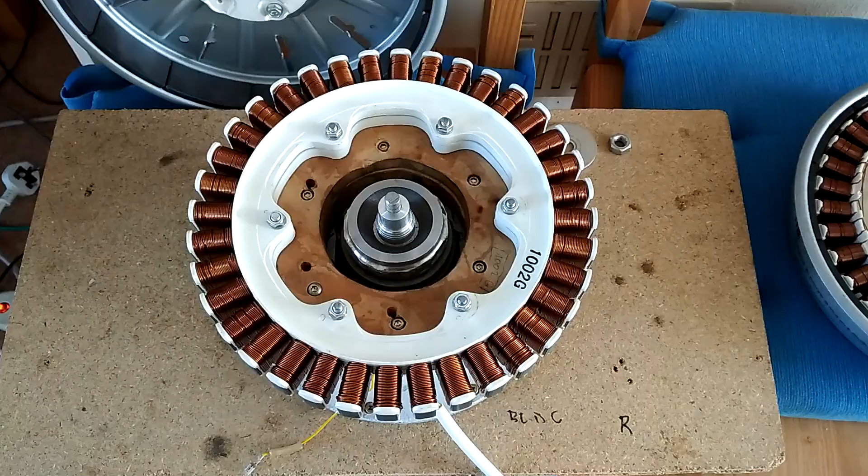So let's demystify the controller Gerard was talking about in this washing machine BLDC motor. So everybody knows that. So this is the... Let's start from hardware, okay? So we will run this one. So you can see this is a standard winding.

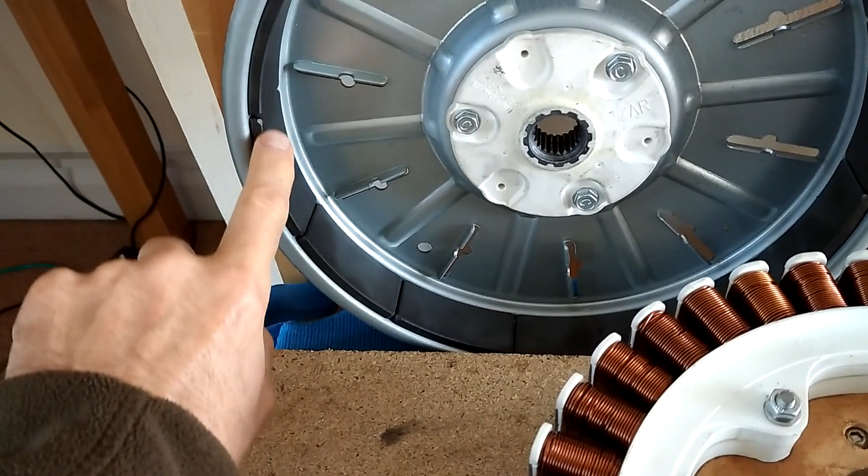I think the wire is around 0.8 millimeter, about 90 turns per slot, and of course that's 24 pole pairs, because every single magnet has four poles. So altogether it's 48 poles, so 24 pole pairs, and we have 36 slots. That's the slots, right? So this is something like this one.

This unfortunately does not have a specification printed on the drum. This is very similar. It's not the same, but it's very similar. So this is what they say: 310 volt DC, 0.6 horsepower, 2 amp, 1400 RPM. So the question is, can we run at least this 1400 RPM with 310 DC? Well, my answer, and I will show you that, is yes and no.

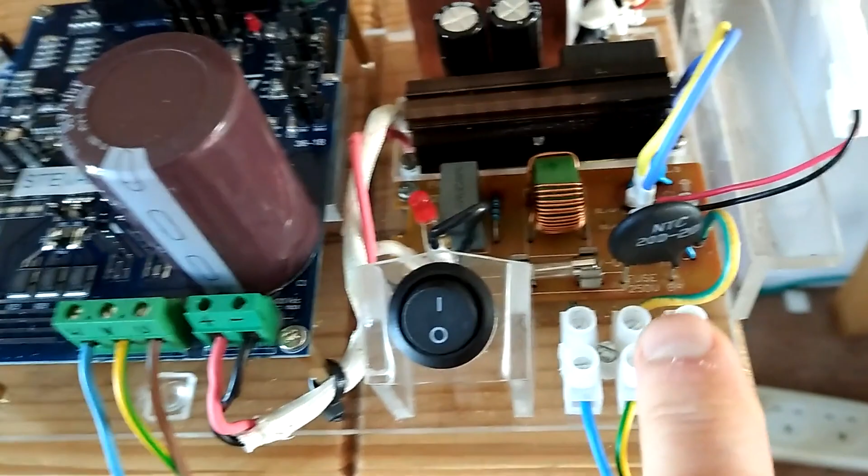Okay, so this is a drum. This is a driver you can build. So what is it? Let's start from here. So this is 240 going through the filters. Very simple, like NTC. This NTC is a little bit too strong because it's 20 ohm. Then AC filters. This is rectifier and capacitors and DC coming into here. So as you can see here, maximum 450 DC is coming here. So normally when you connect into 240, you will have like 330 DC on input.

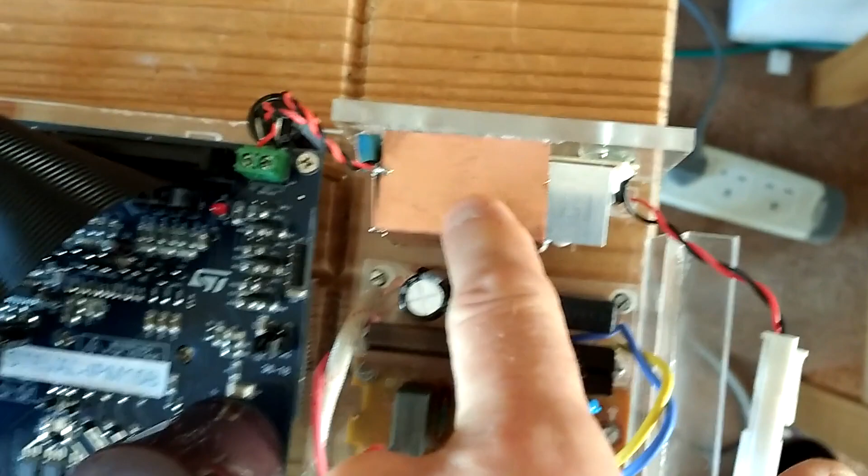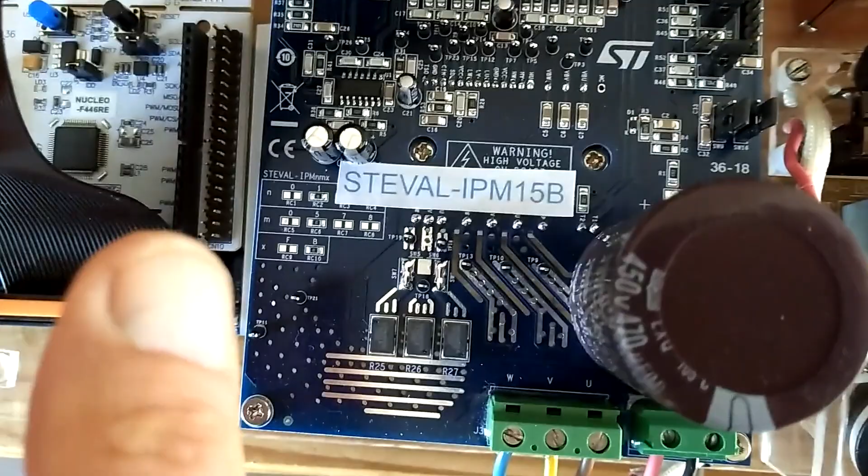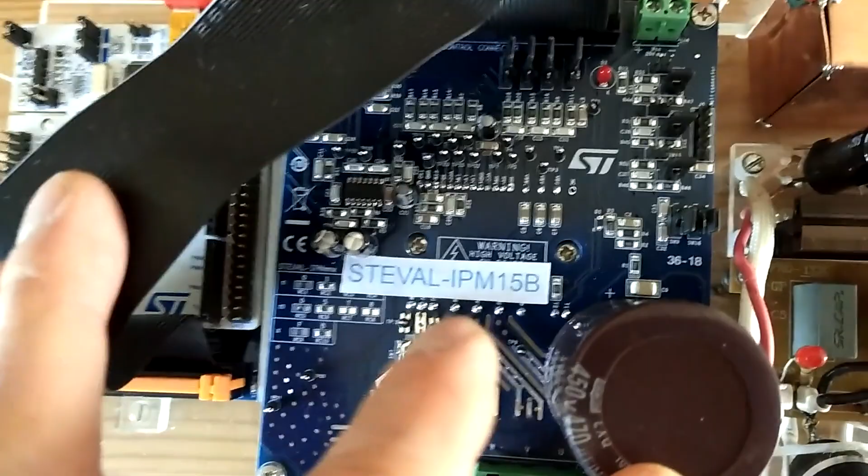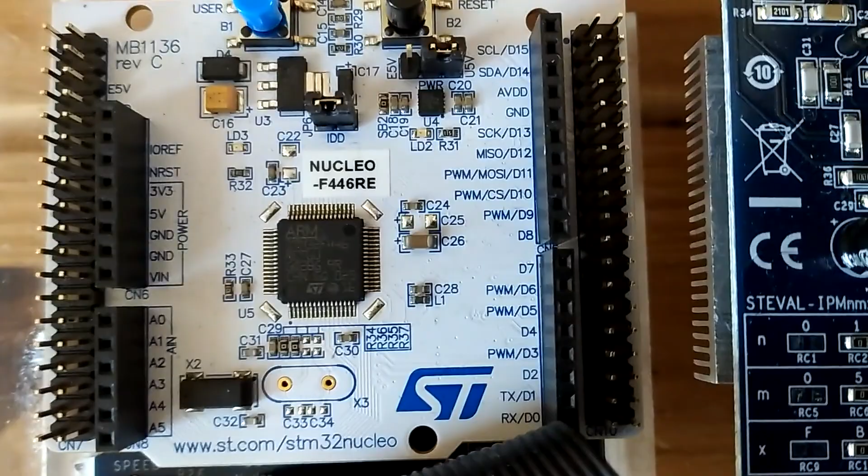And this box is just a DC power supply, 18 volts, because you have to feed this electronics here. So as you can see, here is VCC 20 volt max, and we're using 18 volts. So this is the power stage from STMicroelectronics, STEVAL-IPM15B. So that's a 1500 watt power stage. This is controlled by this controller. I use this one for a reason; I'll show you why. And we're running this processor, Nucleo F446RE, and this is connected to the computer, and we will run the program, and I'll come back in a second.

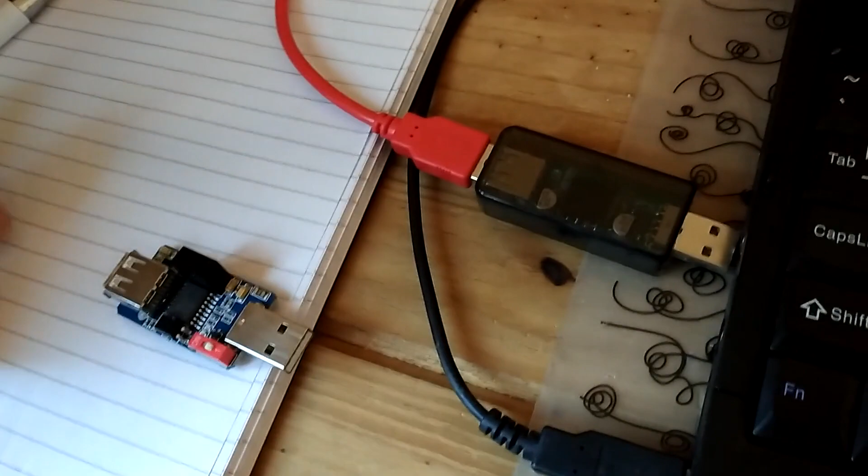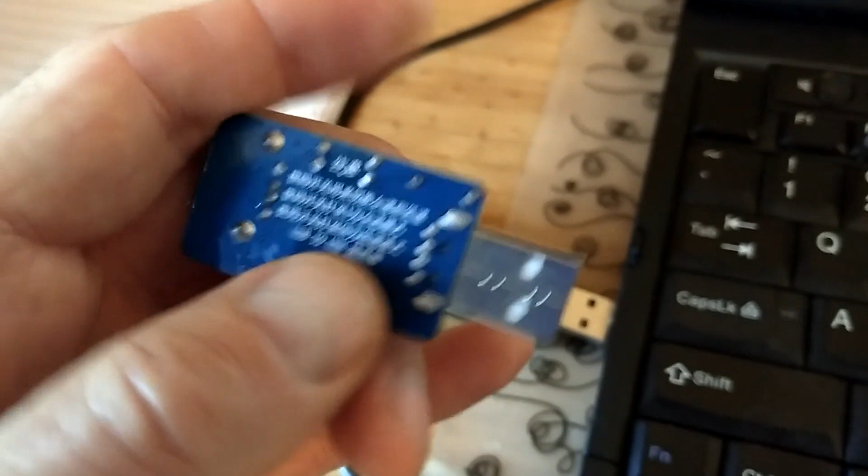Last piece of hardware you need to have is this USB isolator. So this is something like this. It's quite cheap, like 12 pounds or something like that. You can see USB to USB. That's the only thing I can understand from here. And it could be this one, could be that one. USB isolator, right? And why is that? Because on the power stage you have quite high voltage, and it's connected via USB, and you don't want to connect directly into your laptop. So you just need to run it through this one. So we'll connect that,

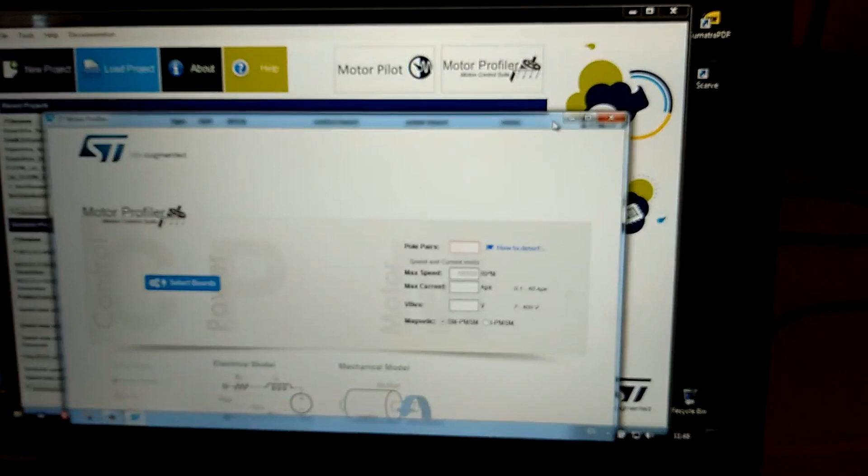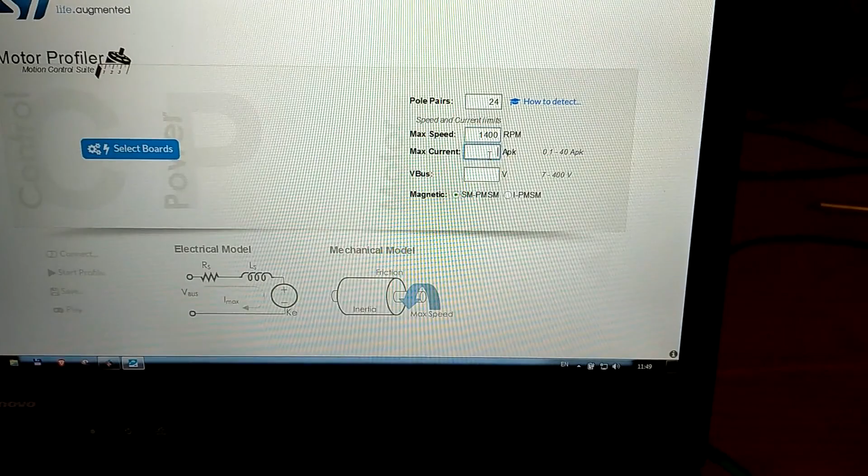and it's already alive. And this is the software we will use, ST Motor Control Workbench. From here, we will go to Motor Profiler. So this is very nice software, which will profile our motor, for which we don't really know all parameters. So we know that we have 24 pole pairs. We want, as they say, 1400 RPM. Max current, they say 2 amps, but let's do 2.5 amps. And V bus, we'll leave it here. So this is something between 7 and 400.

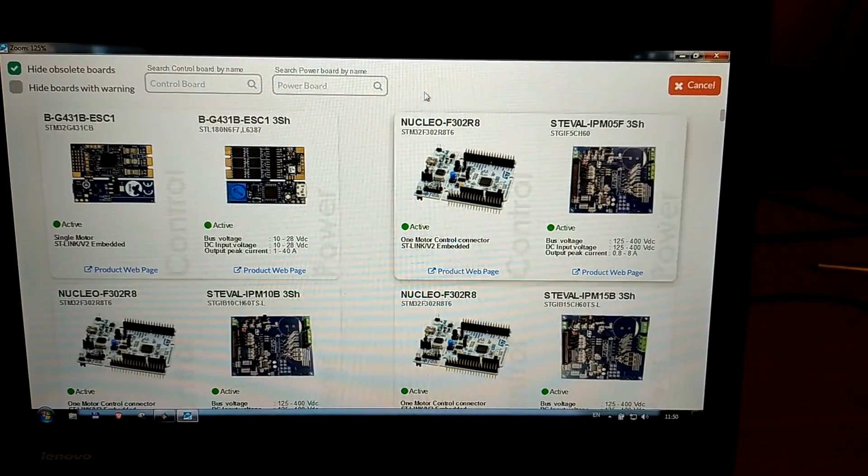But first, actually, we're supposed to select boards. Not all boards available from ST Microelectronics support this motor profiler. So this is the reason why I chose Nucleo F446RE and STEVAL-IPM15B. So we will go 446RE, there you go, and power board 15B. Okay, so we have a pair, they are active, all good. There you go, and it's ready.

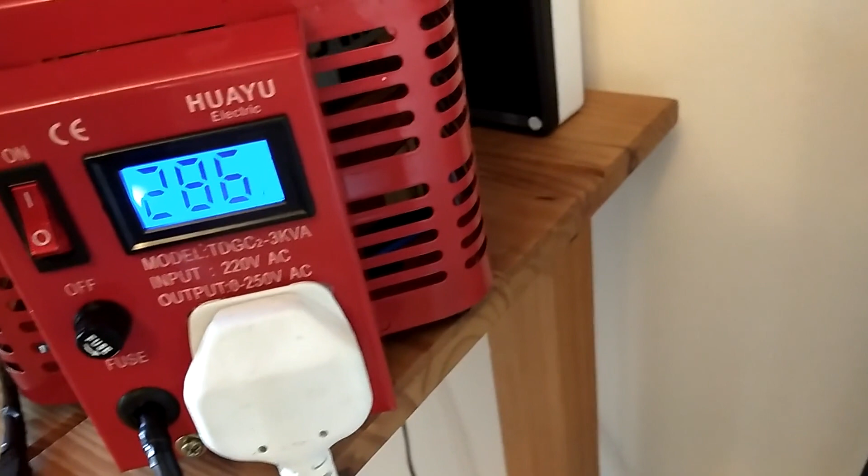This is fed. The power supply goes into an autotransformer. So now it's quite high voltage. We don't want that kind of high voltage because I want to show you something. So let's go back down to 220 volt AC. We will feed it into this one. So that will be about 300 DC on the input here. Okay, and let's start profiling. So we will connect to the board, and now we'll see the information.

There you go. Firmware upgrade required. Why is that? The reason is because there is a different firmware already in the chip, and the firmware needed for profiling is different, simply speaking. So we need to upgrade the firmware. Sorry about the focus, I can't do anything about it. So there you go, everything is ready. So start profile.

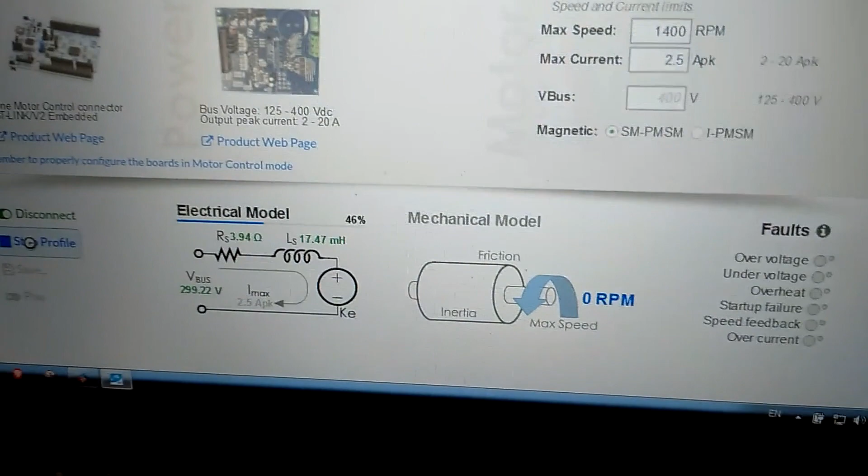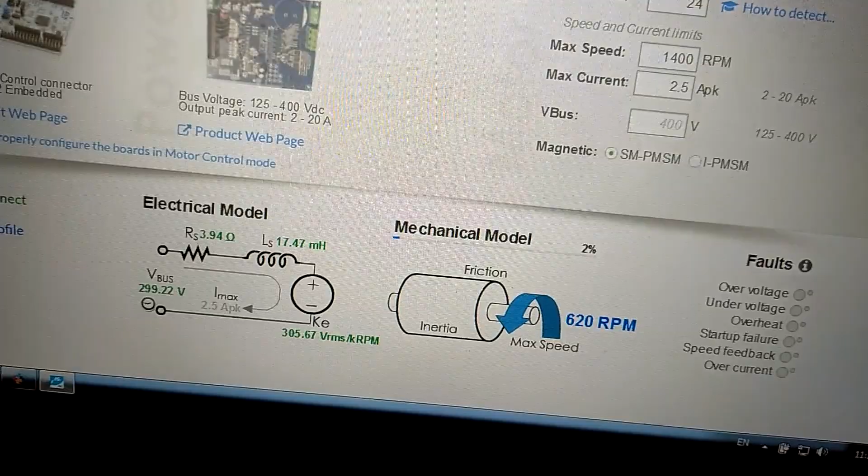It's doing something. Yeah. So already we know the electrical model: 3.9 ohm, 17.5, and this is VRMS. You see the V bus here, 299 volt DC, and this is 2.5 amp we set up. So this is back EMF measured from the motor.

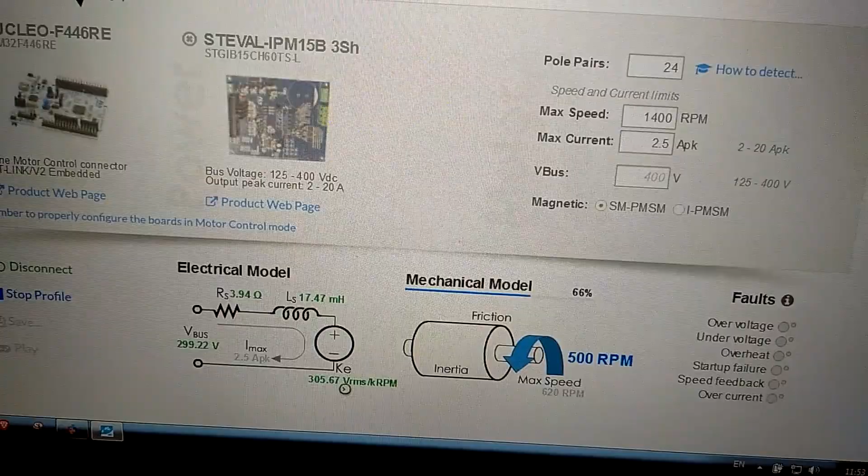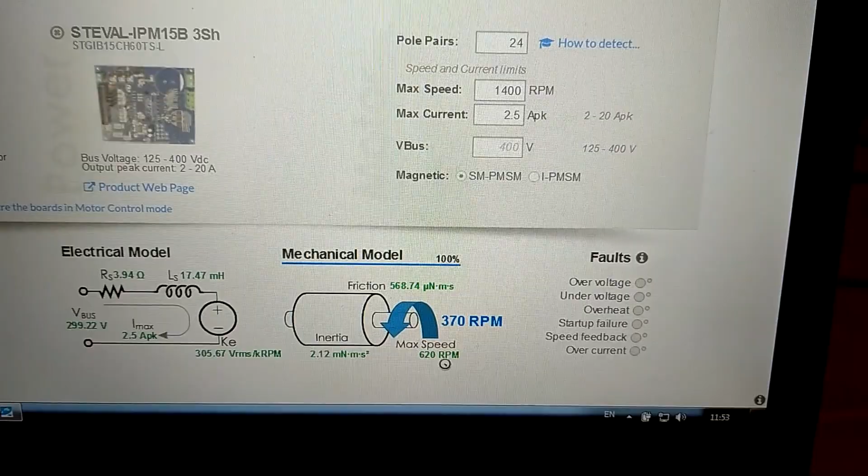And funny enough, it will be a little bit different in a moment, but you will see on average it's 300 something volt per 1000 RPM, KRPM. Can you see the max speed? 620 RPM. And we have friction, inertia, that stuff. You see, this is the maximum speed we can get on this voltage, which has now gone down. It was about 300 volts.

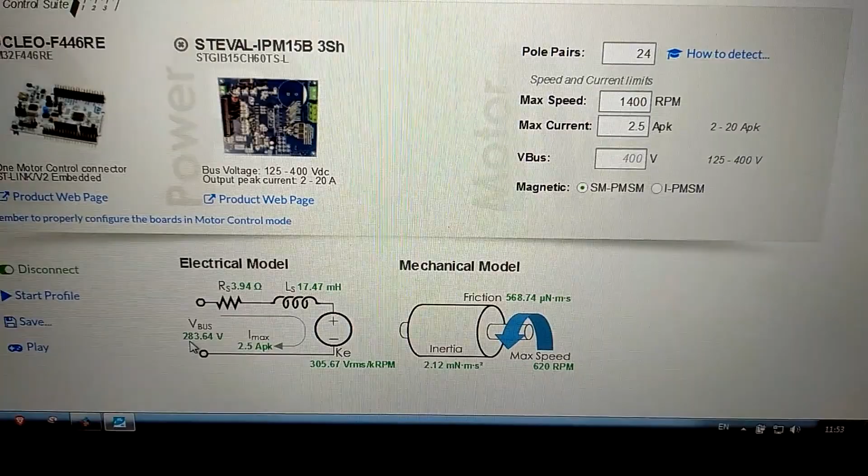Why did it drop from almost 300 to 283? It's because of this NTC, which is not charging fast enough, but it's just an average. So you see that's all we can get. So okay, that's fine. Let's disconnect. Remember this one, 620 RPM.

And let's give it a little bit higher voltage. Let's get up to 280. Yeah, 296 volts AC, which will be 300 something, almost 400 DC in here. So let's connect it again. USB. Okay. Okay, and start profile.

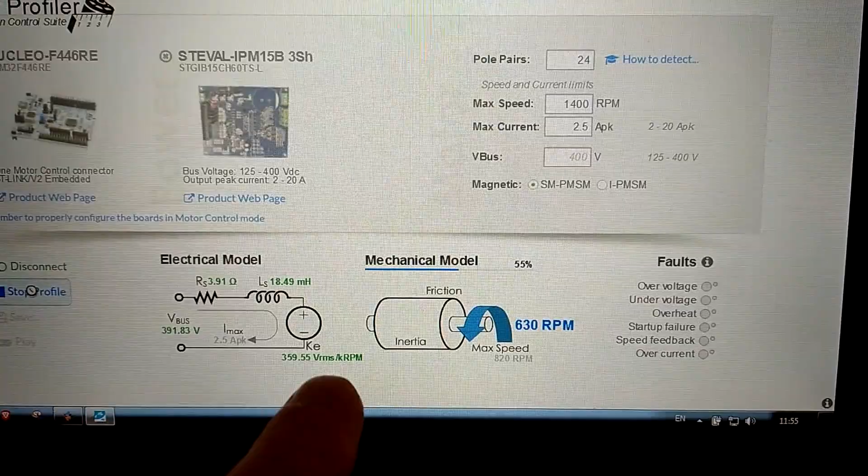390 DC. And what we can see here, we already have 820 RPM compared to 620 RPM. But also, can you see this one? Before it was like 300 VRMS, now we have 360 VRMS. I just raised the voltage. So you have to average that, yeah?

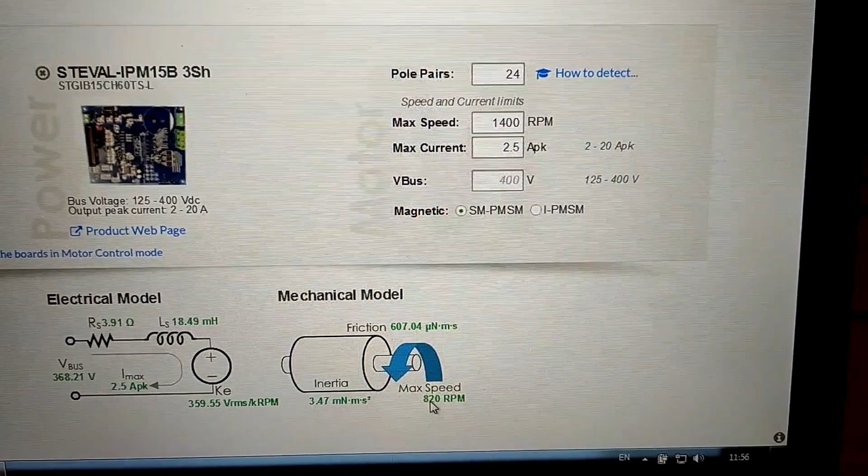You can measure back EMF, this KE value, by spinning the motor by hand, or with a drill or whatever, and measure it on an oscilloscope. But this is a really nice tool to see what's going on. So you can see it's 800, it went down. So it's almost 400 volts and 800 RPM. Nowhere close to 1400 RPM.

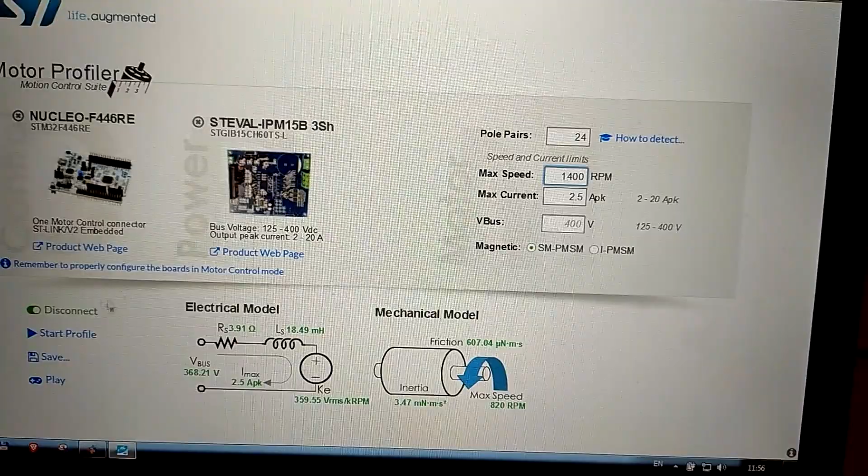So why is that? Why do they say that this motor is running at 1400 RPM? Well, because it's a washing machine, they're doing a trick which is called flux weakening. And we will come back to this in a moment. So let's disconnect. Okay, come back in a sec.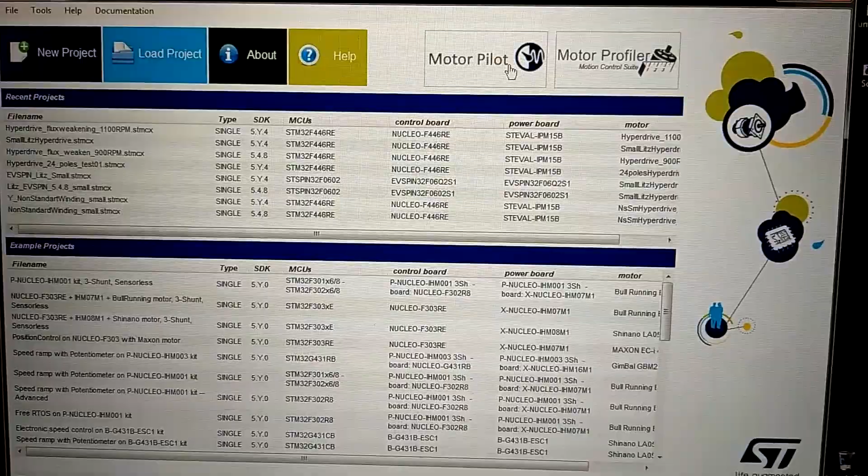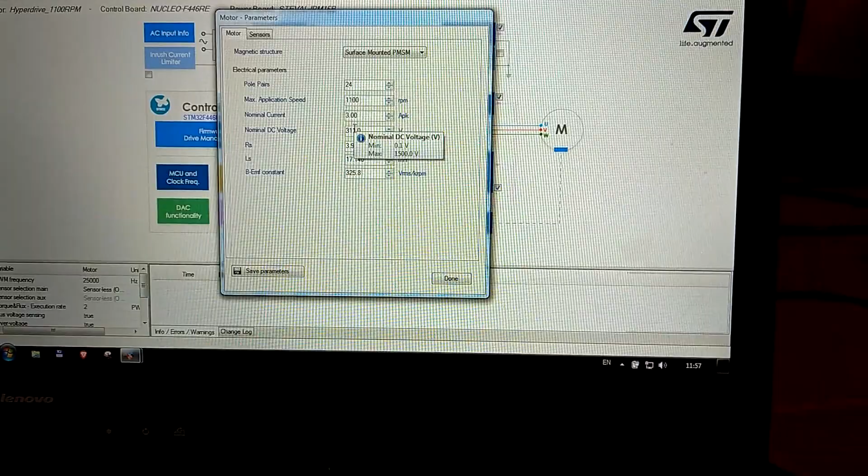So here we have a project using this hardware. Let's click on the motor, and you have to configure, because normally if you just used the motor from the profiler, you would have 820 RPM or something like this. And nominal DC is 311. We don't like it. Let's do 360. And let's leave 1100 RPM for now, because this is more than 800 RPM anyway. And let's do nominal current 3 amps. The rest is fine.

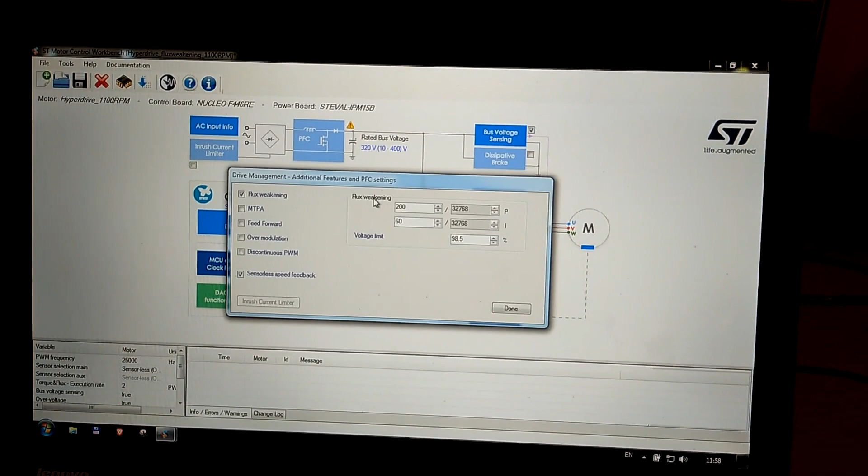So done. And here in drive management you have an additional feature. You have to tick this box, flux weakening. Obviously it's not enough to just enable flux weakening. You have to configure these values here, but that's a completely different story. For now, let's just try to run it at more than 800 RPM. They say 1100 or 1400 RPM with 300 something volts, so I just want to show you what's possible with and without.

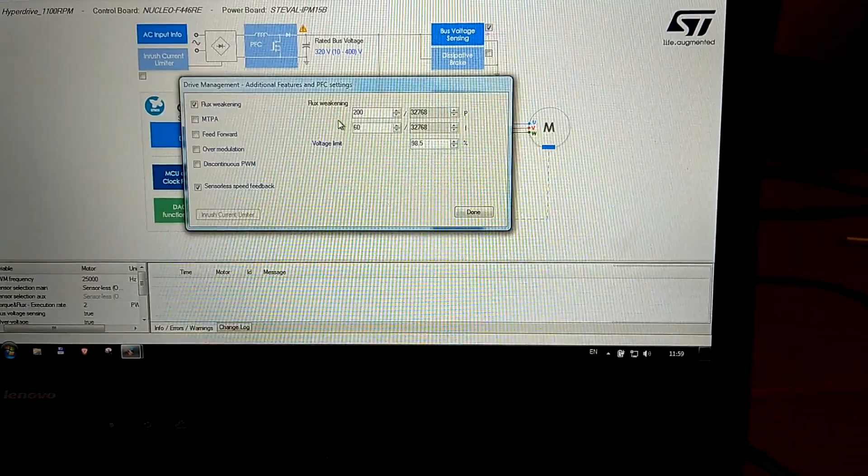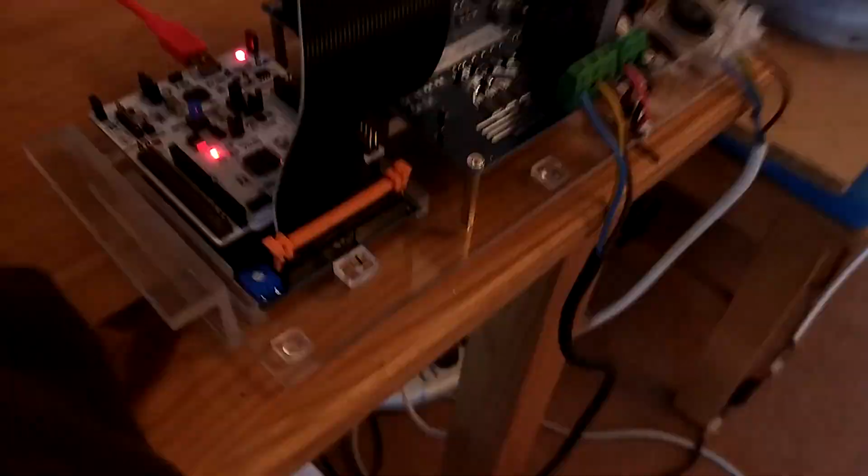So without it, as I already showed you, almost 400 volt DC will give you around 800 RPM with this motor, and no more. You can't do it because of the back EMF from the motor. But you can use flux weakening, and let's see if we can. So now I will configure everything and transfer the firmware into the controller, and I'll come back in a second.

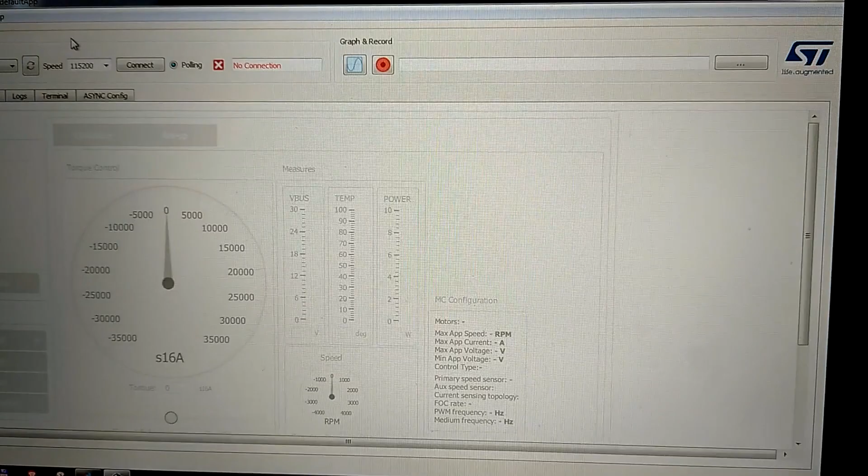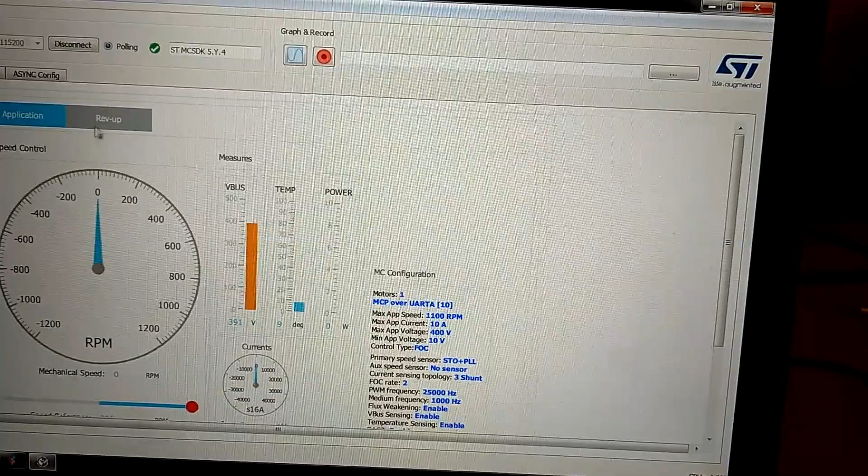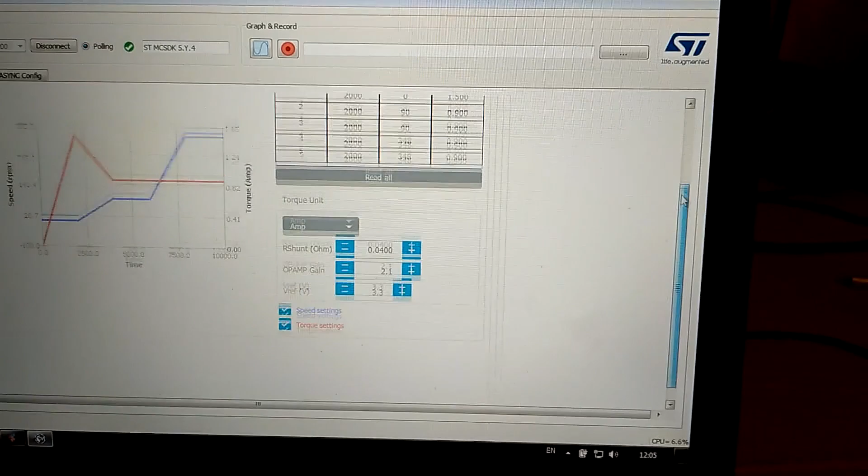Okay, firmware is already transferred, so now we will use MotorPilot and connect to the board. Connect. Let's see, 1100, 10 amps, so let's quickly configure all of this. Reload, change these values, 0.04 for shunt, and the op-amp gain is 2.1 for this board. Okay, and go back. The screen is small, so I have to go back and forth. Just bear with me.

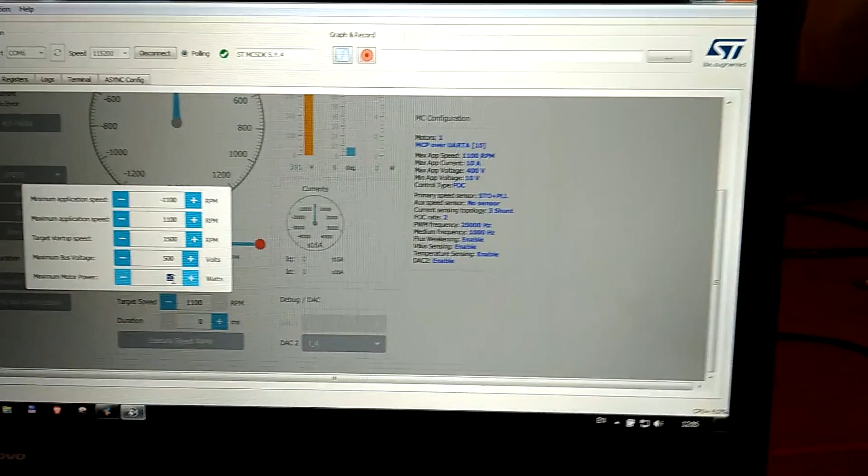Application configuration: we want not 10 watts, that's not enough. Let's configure for 400. What I've done just now is just this value here, power, right? So we will see from 0 to 400 watts of power what the application is taking, power stage, and advanced configuration to see some values here on the right side.

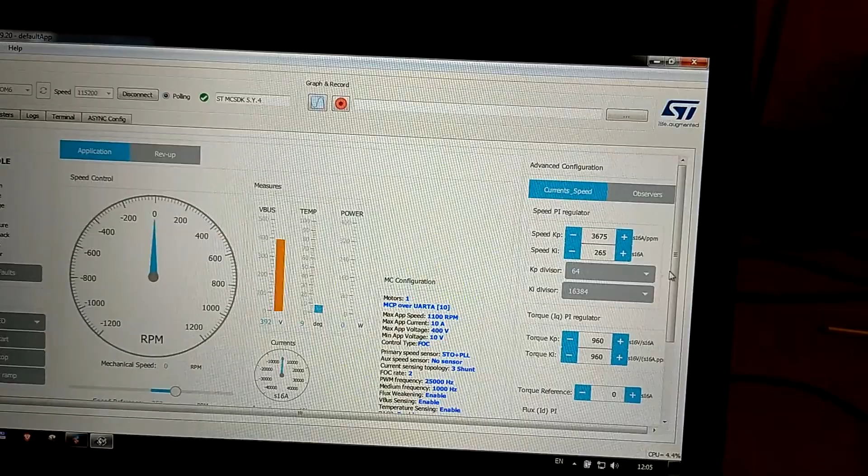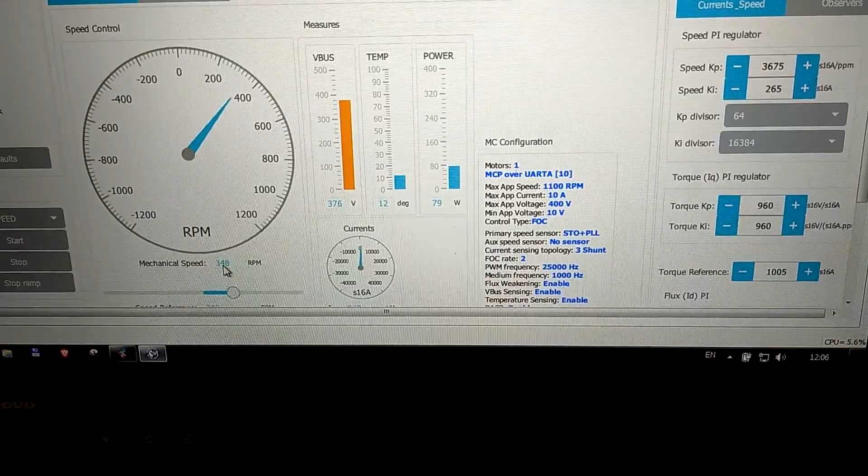And we will start from 350. Let me see, this is set up for 350, so 350 RPM. Then we will go to 500 slowly, not rushing. So okay, it's all good, and start. There you go. Okay, so now we have mechanical speed 348 RPM.

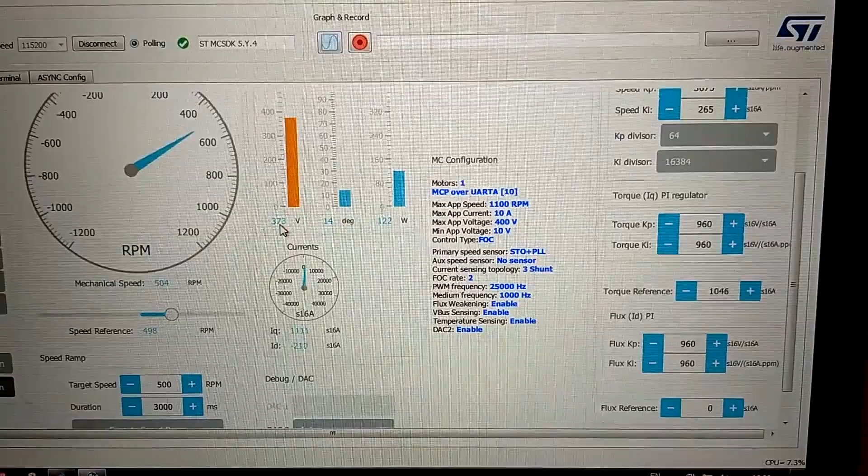Okay, so let's speed it up to 500. Cool, works. How many volts do we have? We have 373 volt DC. Okay, let's go to 600. 700.

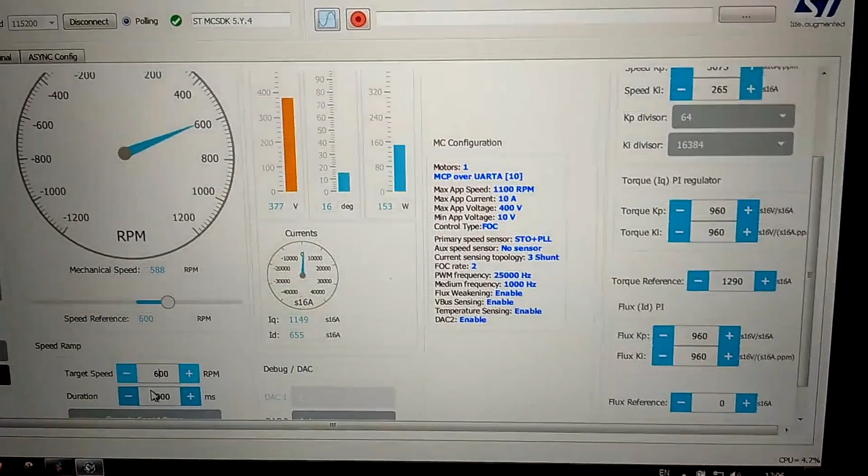700. 800. So we're coming to the point of the amount of RPM we can get without flux weakening. But because in this project I configured flux weakening, as you can see here, flux weakening enable, right? Then I can go further. 900 RPM. Yeah. 900 RPM.

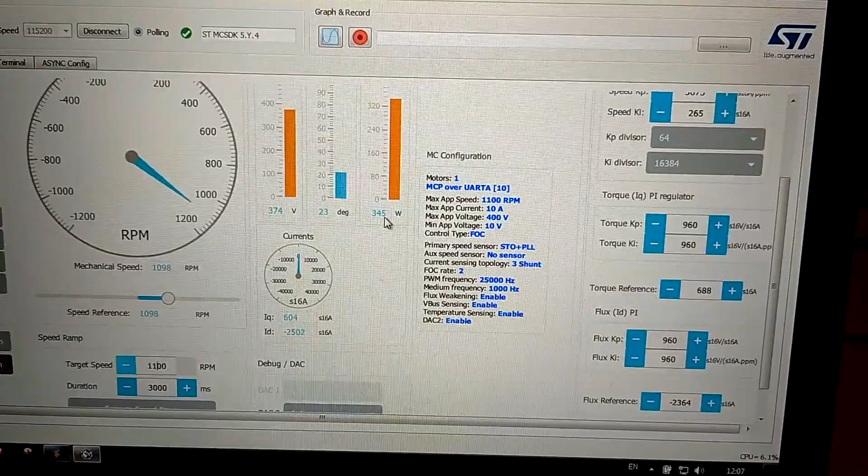Let's go for 1000. Yes, we got it. 1100. We have 1100 RPM, mechanical speed, and it takes 350 watts. Can we go further? Not at the moment, because I configured only for 1100 RPM. So even if I will do 1150, I won't get anything because it's not configured, right?

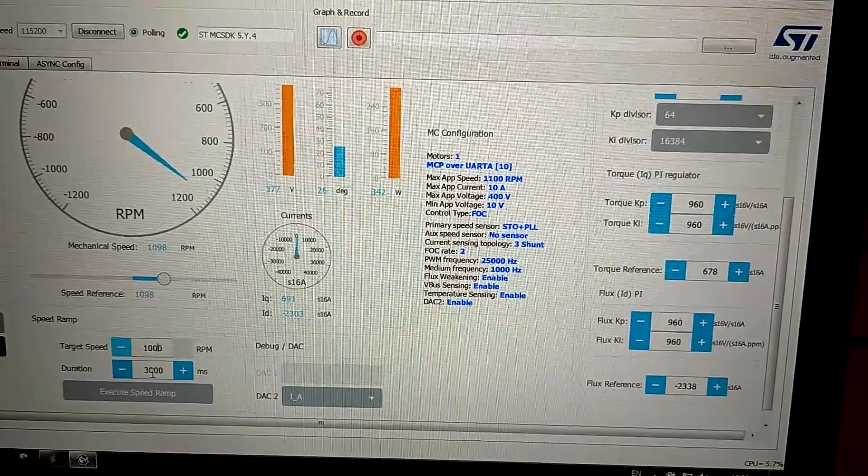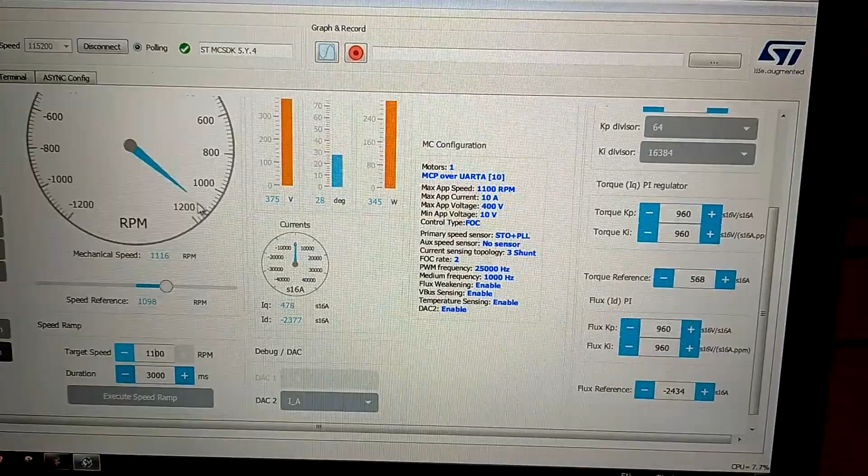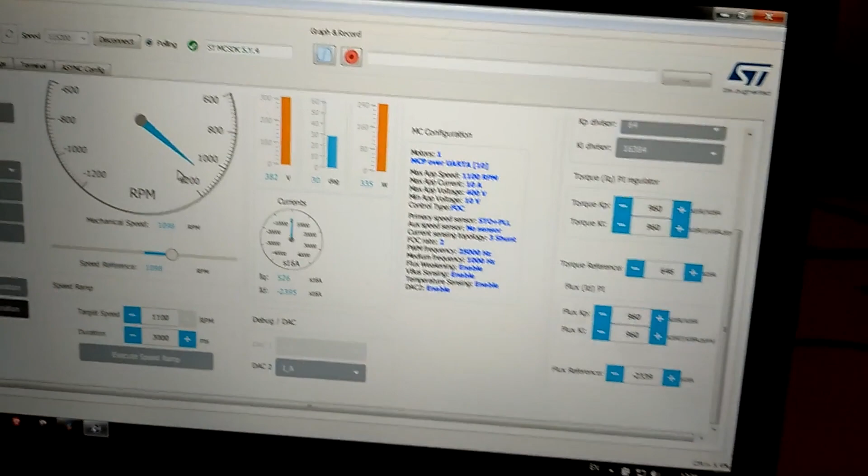So slowly, let's go down. Okay. Let's go back to 1100. Let's confirm. Oops. That's because it jumped into 1200 because it's not fully configured with speed regulators over here. But that's a completely different story. Now we're just showing that we can get more speed for a voltage which allows us only, like, 800 RPM. We can get 1100 and 1200 and maybe more.

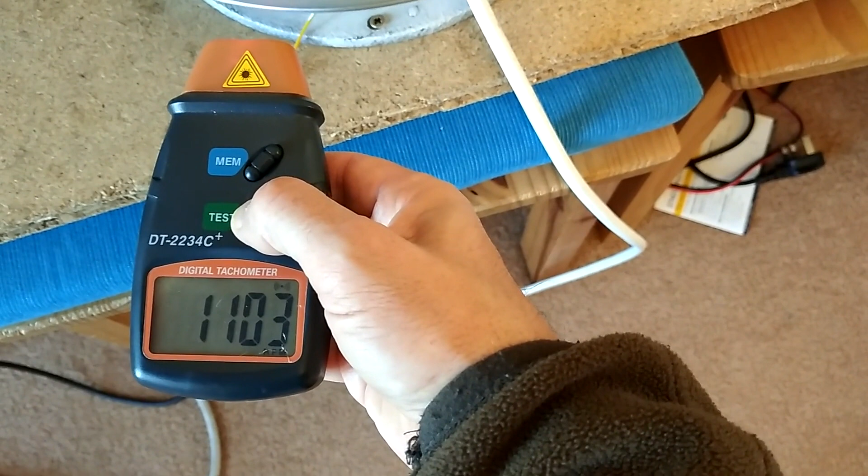And let's confirm that. It's 1100 RPM. Yep. Okay. So now the problem is that back EMF is so strong that if all of a sudden the flux weakening algorithm would stop, it would most likely blow the power stage, because all the voltage will go back into the power stage from the motor, and it will be boom, disaster, right? So I will go slowly.

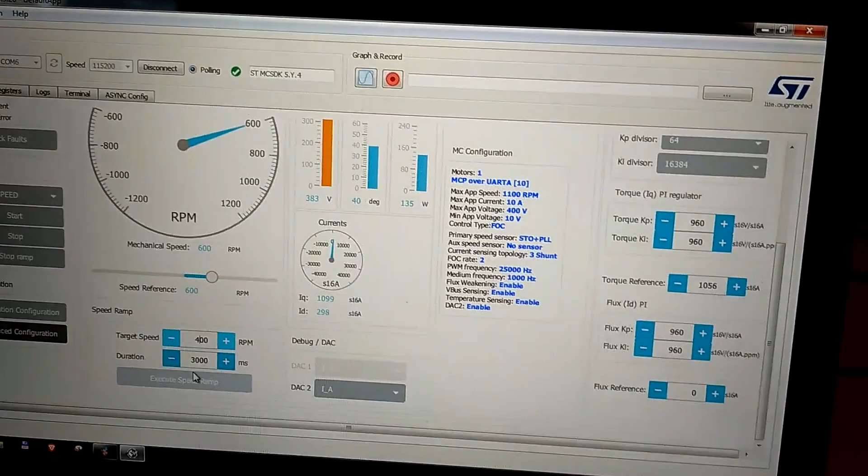So that's fine. 400. So the question would be, for 400 volts, can we get 3000 RPM? I don't know. I don't think so, to be honest. But here's a problem with flux weakening. Okay. Here's a problem. So what's happening when a motor spins?

Yes, the faster it spins, the stronger back EMF is growing. So if you have enough voltage to counteract the back EMF, you can still run some current and spin your motor faster and faster to the point where the difference between your V bus and your V EMF, back EMF, is almost the same. It's quite difficult for me to write it looking on the phone. And no current flowing, so you don't have any torque, right? So there should be some difference.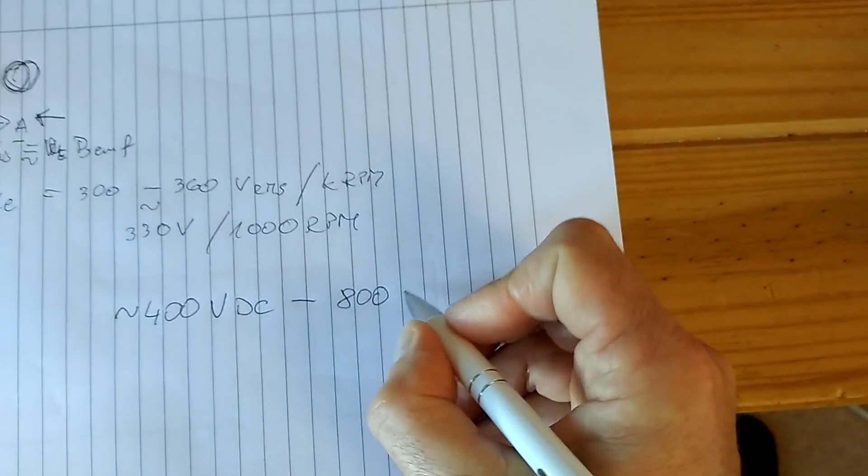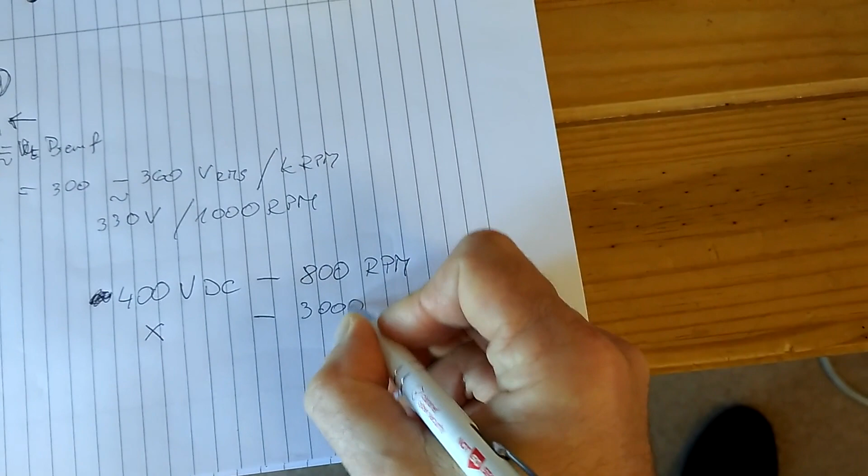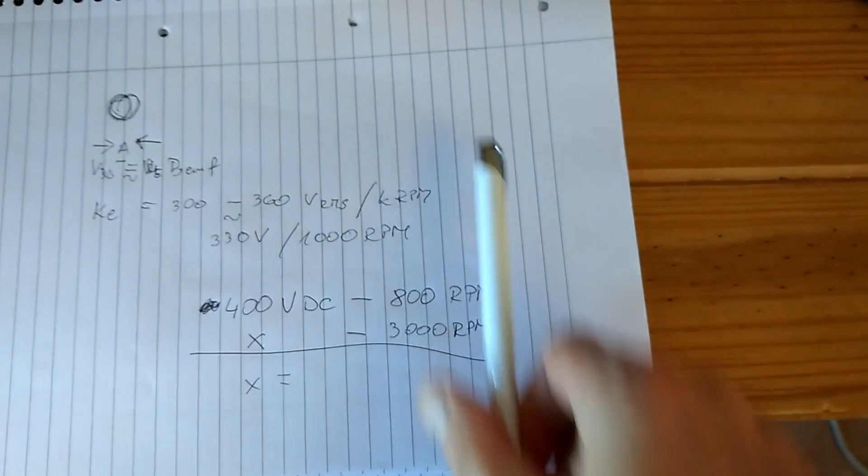So that's why we have around 400 volt DC, and that gives us 800 something RPM. So you can calculate what voltage you would need to have to get 3000 RPM. Just calculate that and you will see X. Actually, I'll do it. Calculator. So it's 400 multiplied by 3000, divided by 800. Can you see this value?

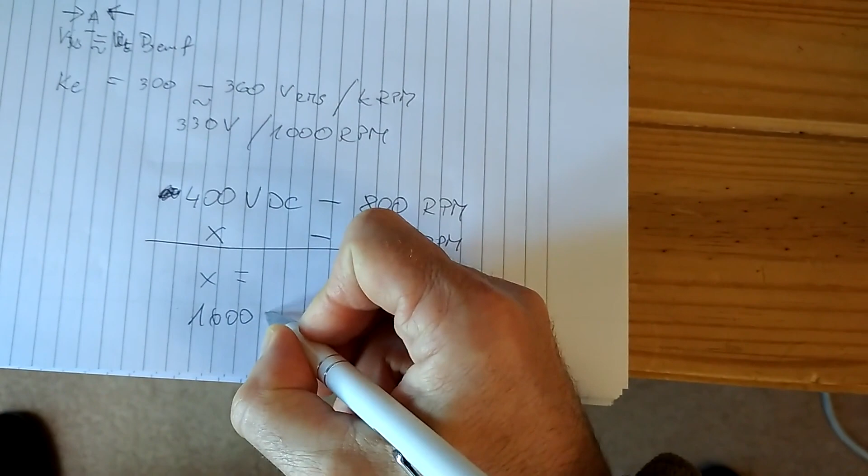So I would suggest that you would need to have a 1600 volt DC power stage to run it without flux weakening. So in theory, you can have half of it, or maybe like 1000 volt DC, configure flux weakening and still run it at 3000 RPM. That's the trick. But here's the problem with flux weakening.

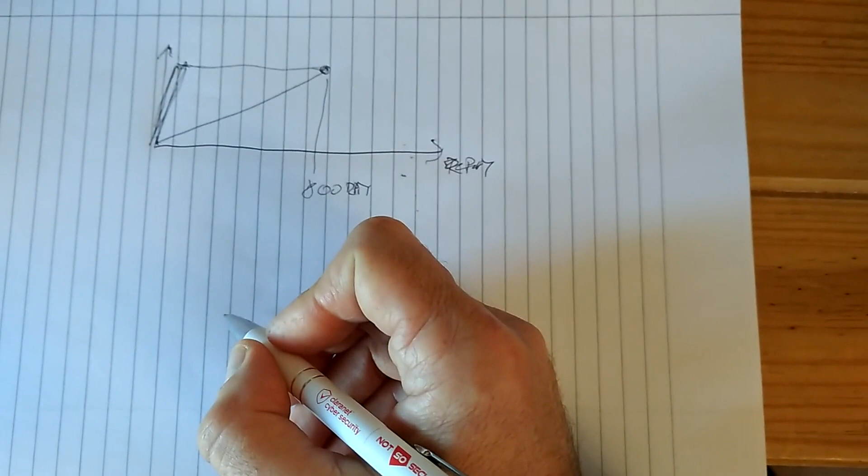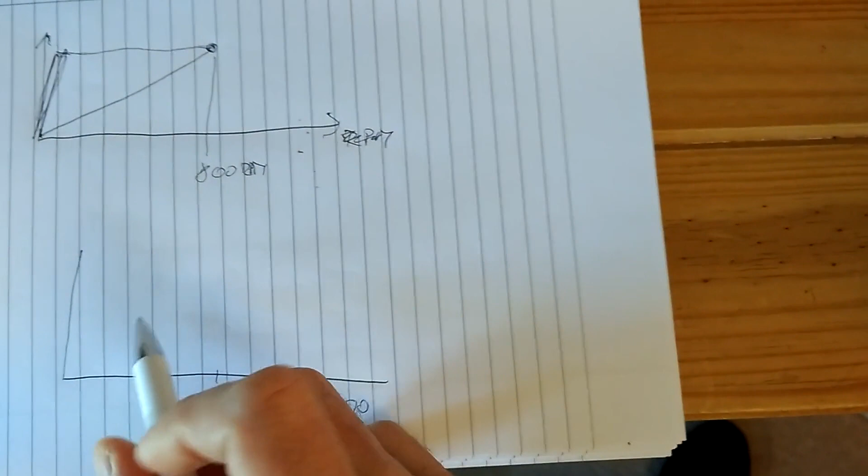Normally, what's happening, you have speed, no, that's wrong actually, RPM. So it goes into some value, which is, in our case, 800 RPM. And the torque grows very quickly up to maximum value, and it keeps that way. So once you apply extra power to counteract back EMF, you're going from 800 to, let's say, 1400 RPM. So you hit 800 and you're going to 1400.

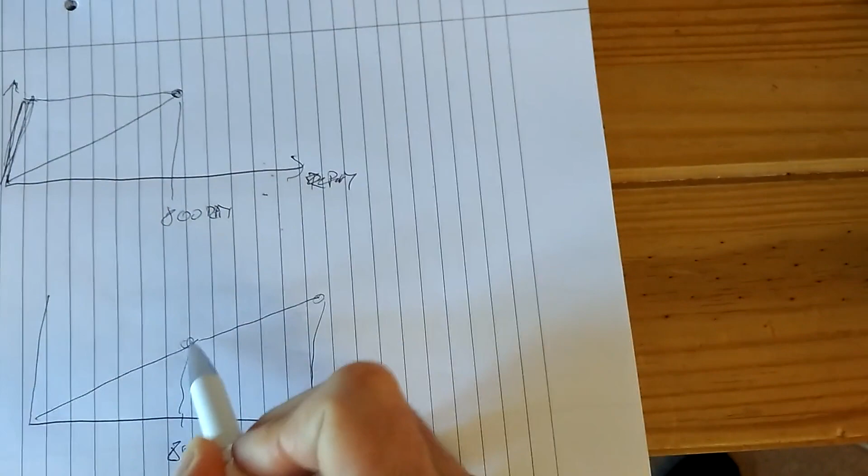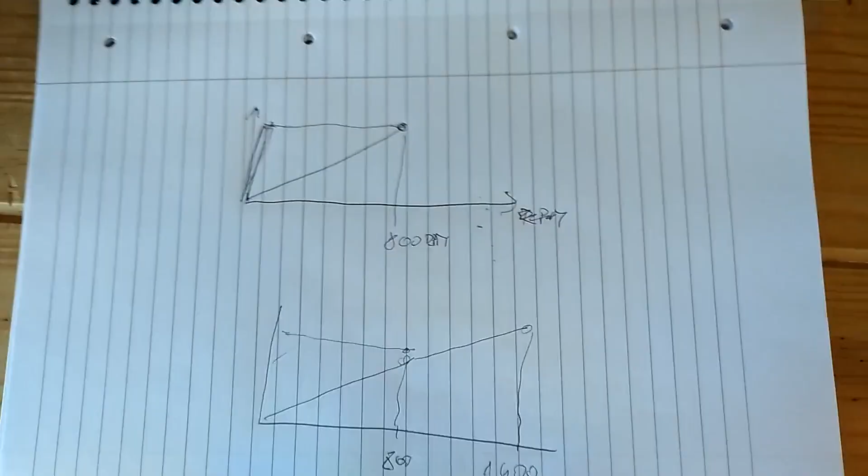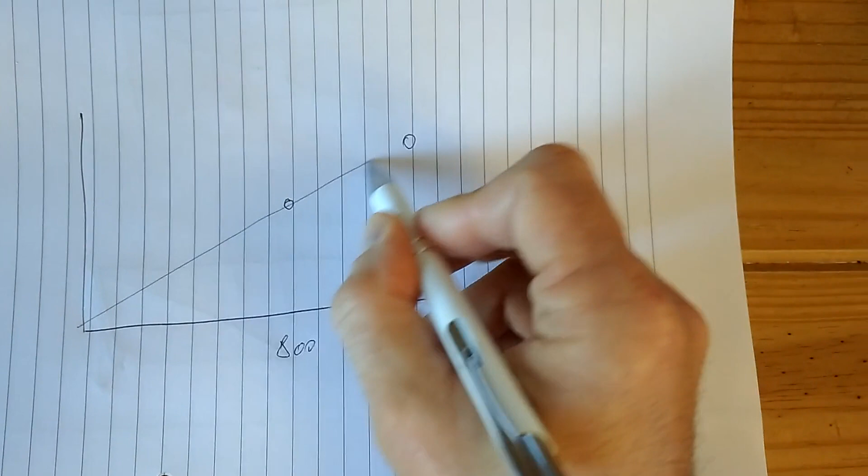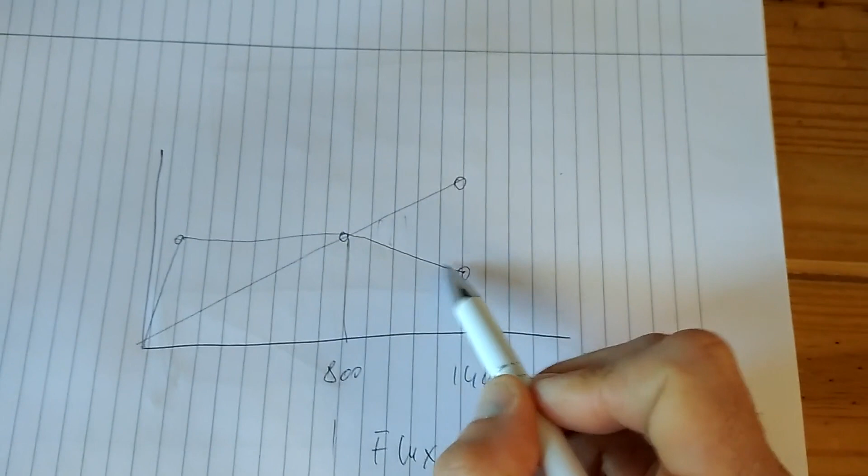The torque goes like this. Sorry, it's really difficult. Let's do it this way. 800, 1400. So the torque goes to some maximum value and keeps that way. Then you kick in your flux weakening, right? And the torque goes down. Okay, so you still have some power, because power is torque multiplied by speed, but it's not the same torque value, because you're weakening the field. So this is the problem with flux weakening.

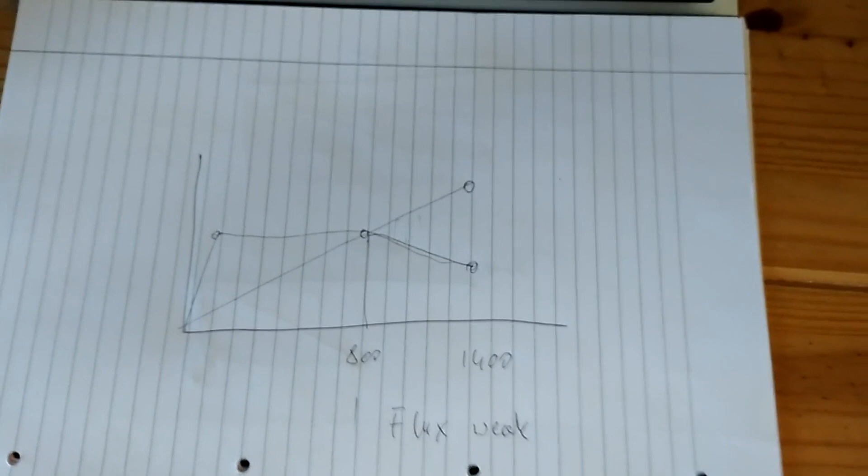So yeah, actually that's it, really. So one more time here: 400 volt DC, 800 RPM.